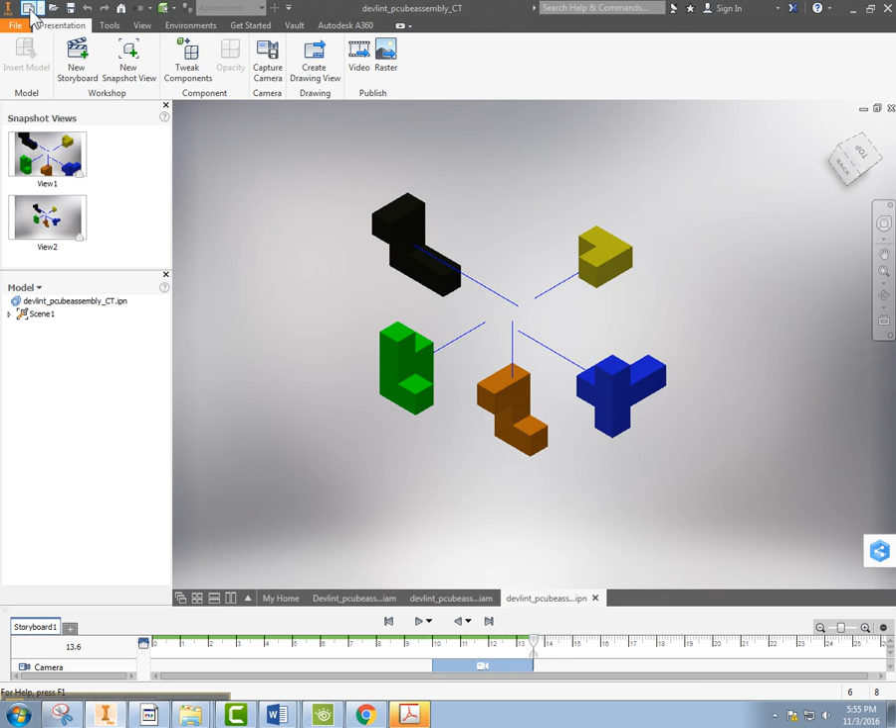So I'm going to go up to New, and I'm going to go to our CHS drawing sheet and click Create, and we should have size C here. Okay, so this should be the one that we created. Make sure it says C, and if not, go back to the video that shows how to upload the CHS template. So now I'm going to go to base just like normal, and it automatically selected these shapes.

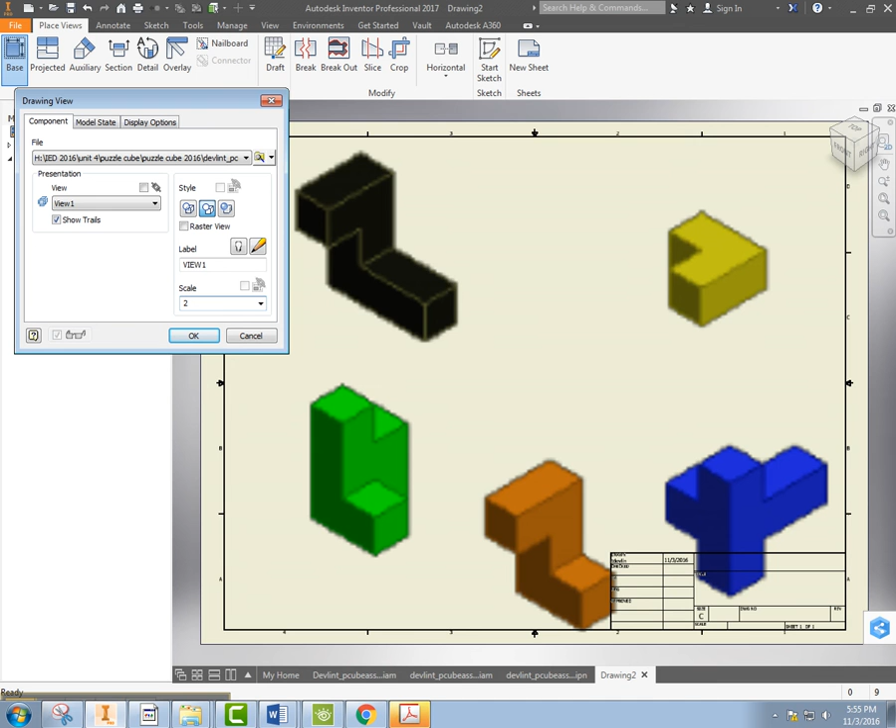So I'm going to see what happens if I go to 2 scale. That's really big. So I'm going to go to 1, and I'm going to click the shaded button, and I'm going to click OK. I'm going to move this up into the corner.

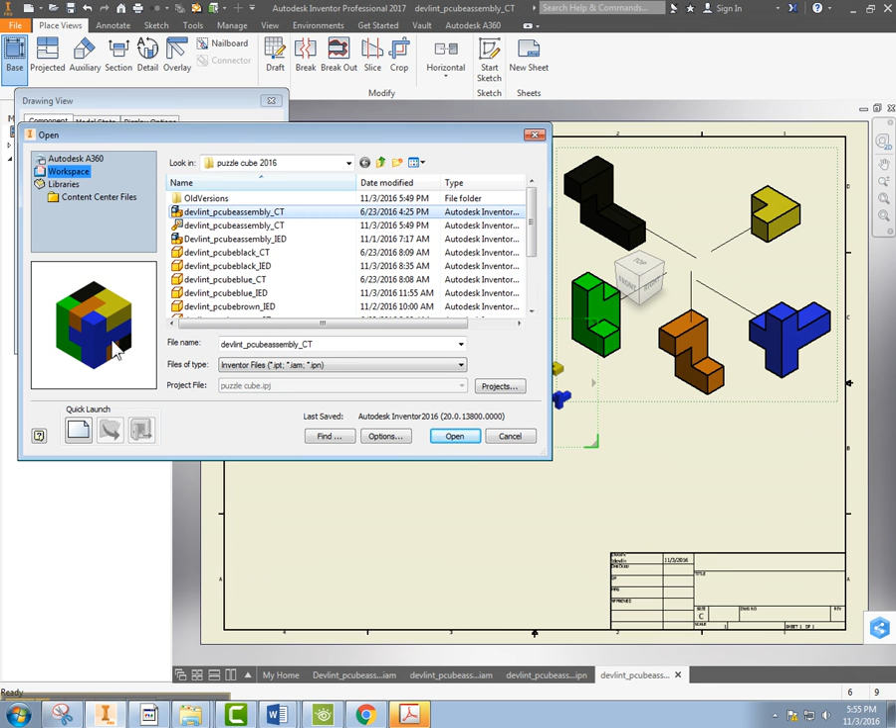The next thing I'm going to do is I'm going to go back to my base. I'm going to go here to the folder with the magnifying glass, and I'm going to find my assembly. So I've got a preview picture, it looks right. Click open, it's really small. So I'm going to go to 2. That's 2 times the normal scale, and I think that looks like a good shape. I'm going to click on shaded, click OK, and I can move this to where I want it to so it looks nice.

The next thing that I'm going to do is I'm going to put a parts list in. So we're going to go to annotate, and over here we have our parts list somewhere right here. So I'm going to click on parts list, and I'm just going to go ahead and say OK. I'm going to place this, and it's got some stuff that we don't need.

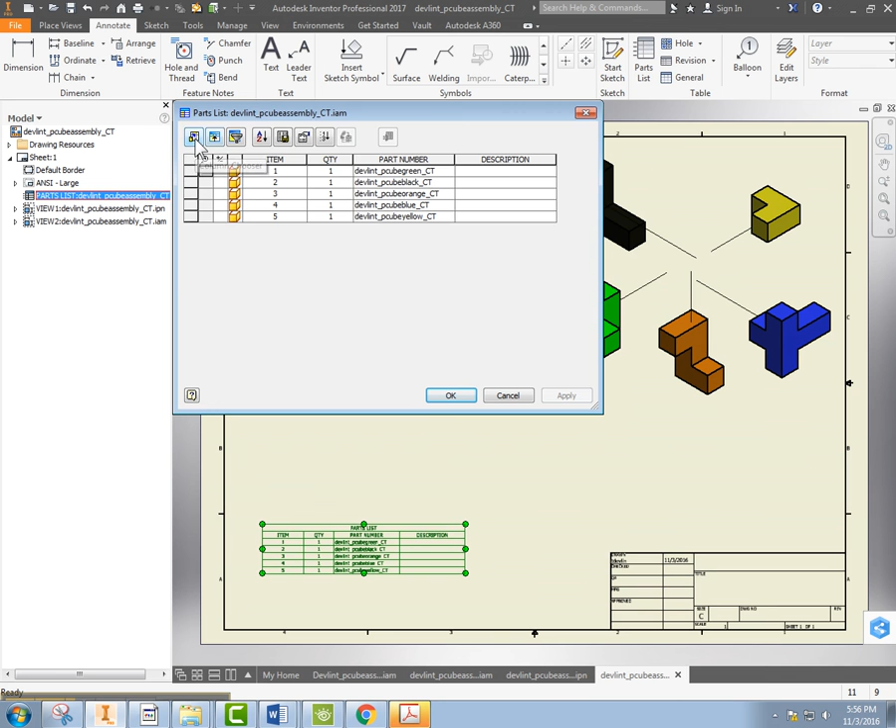So I'm going to double click on this, and I want to get rid of this description column. So I'm going to go here to column chooser, click on description, click remove, click OK, click OK, and there's a nice looking parts list. If you guys want, you can figure out how to change the font, but this is fine.

The last thing that we're going to do is we're going to add our indicators here to our parts so we know which part is which. So if I go to balloon, I can click on a corner. I need to click, and it's going to look like it wants something else, but just one line is fine. I right click, go to continue, and then I just keep going.

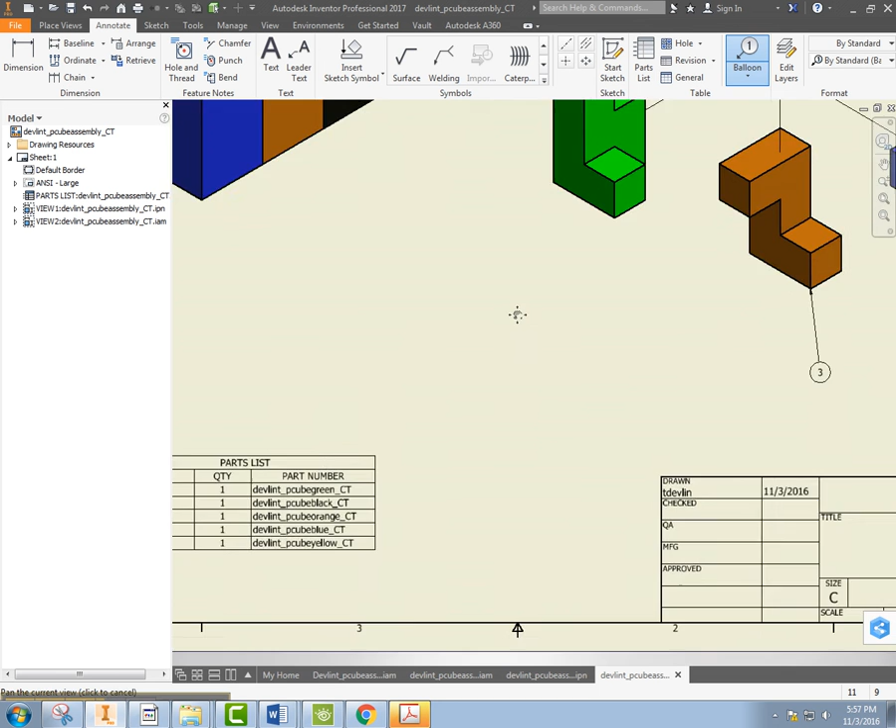Click on a corner, click again, right click, continue, click on the corner, click here, right click, continue, go to the other part, right click, continue, click, click, right click, continue. And so part number 3 should be part number 3. It's my orange cube here.

So if that looks good, you can take your snip tool and snip this and go ahead and paste this as your last slide for Inventor into your portfolio. And now you're ready for the statistical analysis and building your model.